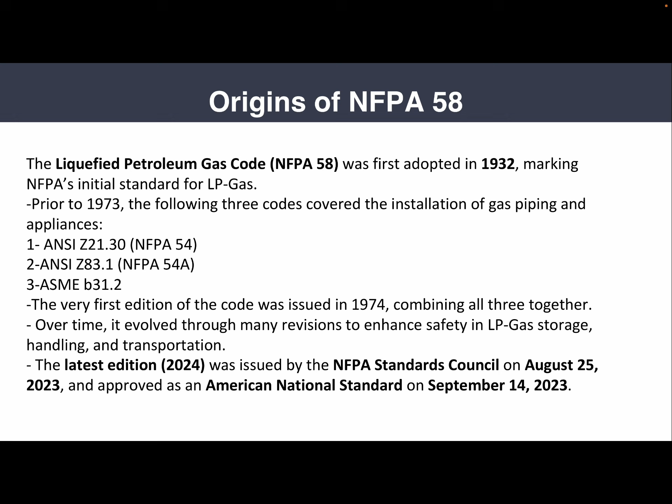In 1974, these were merged into one unified document under joint sponsorship of the American Gas Association and NFPA, creating the first complete fuel gas code. Over the years, it evolved to reflect new technologies and lessons learned from incidents. For example, in 2011, it introduced cathodic protection for underground containers, removed obsolete valve piping rules, and prohibited non-ASME railroad tank cars. In 2014, it added vehicular barrier protection, harmonized container requirements, and expanded personnel qualifications and cathodic protection for piping.

2017 addressed hot air balloons, updated snow load and vehicle impact criteria, added Chapter 12 for mobile LP gas systems, and centralized fire extinguisher rules. In 2020, it added fire-resisting material criteria, revised extinguisher use guidance, and included inspection rules for CGA connections. In 2024, it added Chapter 16 for food trucks, clarified scope for LP gas industrial processes, updated horizontal container installations, and consolidated emergency remote shutdown requirements. So, codes must adapt to new risks, technologies, and user practices.

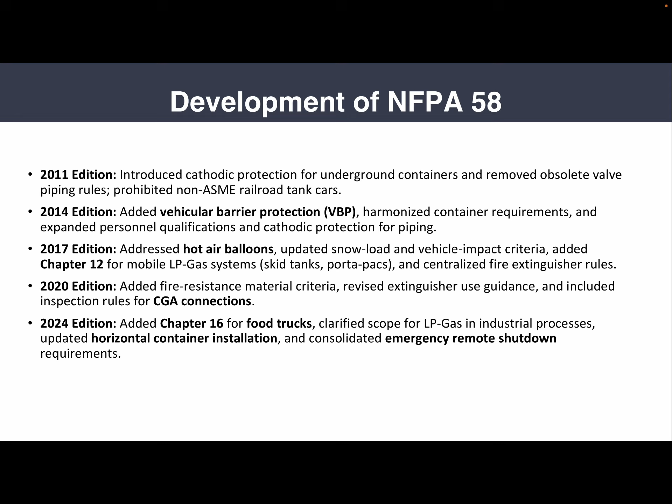Administration Overview. Chapter 1 of NFPA 58 covers the administrative framework of the code. It defines the scope, application, retroactivity, equivalency, units, and enforcement. It applies to the storage, handling, transportation, and use of LPGs, the LPG properties, and the federal regulations referenced, which are the DOT regulations 49 CFR for transportation.

So, NFPA 58 applies to any system involved in storage, handling, transportation, or use of LP gas as a fuel. That includes cylinders, piping, and containers used to supply LP gas, systems serving industrial and commercial operations, transportation vehicles, and marine terminals receiving LP gas for distribution. But for every applicability, there are also exemptions. It does not apply to natural gas refineries or petrochemical plants, chemical process facilities using LPG as a reactant, utility gas plants under NFPA 59, and systems already covered by NFPA 54 or transportation regulated by the Department of Transportation.

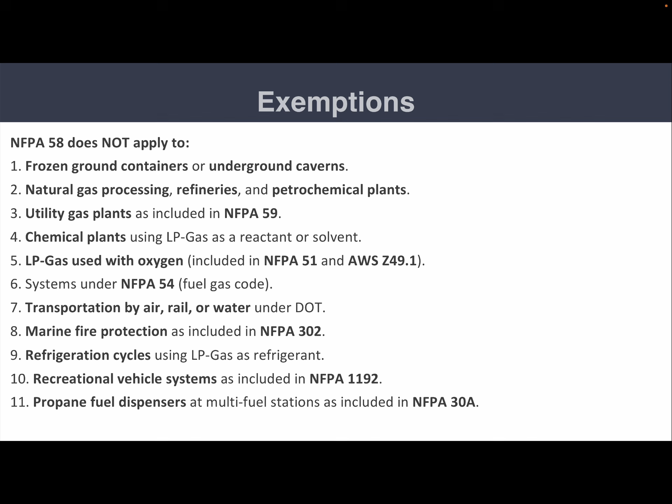Here we have the Arad LP gas explosion, which occurred last February in 2025. This happened in my country, in the Kingdom of Bahrain. On the 12th of February, a restaurant in Arad exploded after an LPG leak accumulated in the kitchen. The upper floor, illegally used as labor accommodation, collapsed, causing 2 fatalities and several injuries. Investigation found flexible hose leaks, absence of automatic shut-off valves, no gas leak detectors, unapproved occupancy conversions, and lack of valid civil defense clearance, which is the AHJ.

The restaurant opened without the approval of the AHJ, and the entire gas system was not approved or listed. So this incident clearly illustrates why enforcement of NFPA 58, NFPA 54, and the Bahrain 2025 code is absolutely essential.

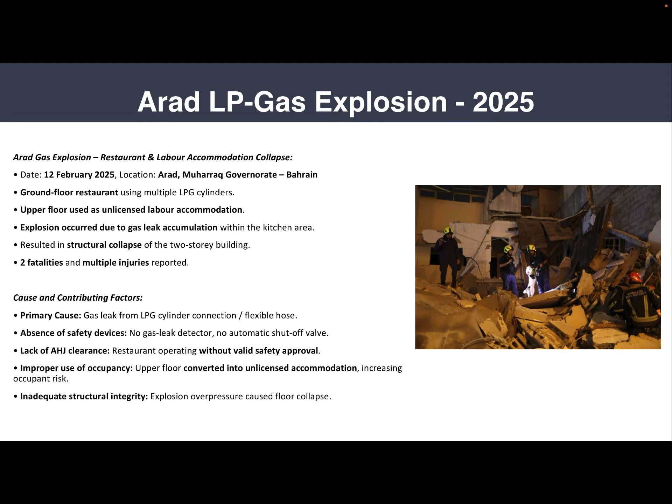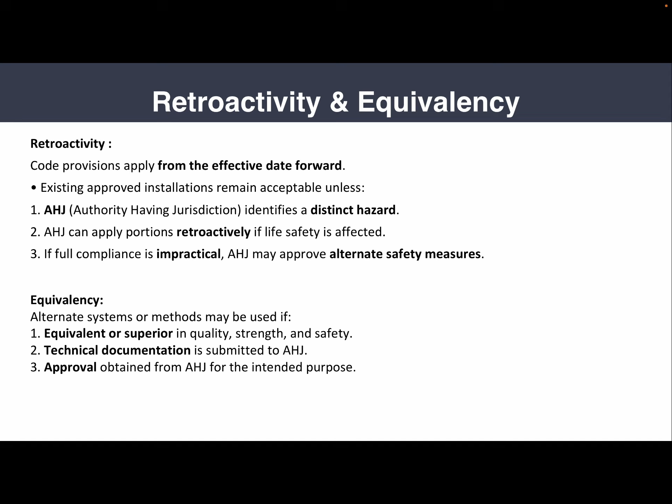Retroactivity and equivalency. Retroactivity means new code provisions apply only from the effective date forward. Existing systems may continue in service unless the AHJ identifies a condition creating a hazard. Where full compliance is impractical, the AHJ can approve equivalent protective measures. So equivalency allows alternative systems that are equal or superior in strength, durability, and safety. In order to gain approval, documentation and performance evidence must be submitted to the local AHJ, which provides flexibility while maintaining safety.

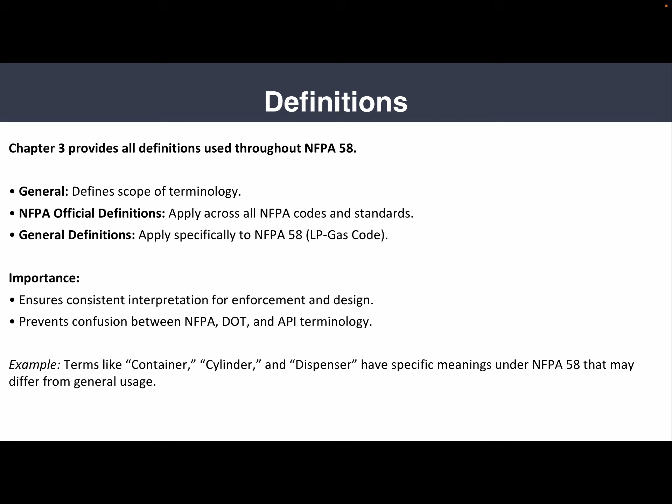Chapter 3 provides all definitions used throughout NFPA 58. General definitions define the scope of terminology. NFPA official definitions apply across all NFPA codes and standards, and general definitions apply specifically to NFPA 58, the LP Gas Code. Terms like container, cylinder, and dispenser have specific meaning under NFPA 58 that may differ from general use. So, first and most important thing, what is an LPG?

Liquefied petroleum gas, commonly propane or butane, is a gas at ambient conditions that becomes a liquid under moderate pressure. It is colorless and odorless. Therefore, ethyl mercaptan is added for leak detection. Because its vapor is heavier than air, leaked gas tends to settle in low areas, forming explosive mixtures.

And when we talk about flammability limits, we're referring to the gas concentration range in the air that can actually ignite. If the gas concentration is below that range, it is too lean, meaning not enough fuel to sustain combustion. And if it's above the range, it's too rich, meaning not enough oxygen to burn. So specifically for LPG, which is mostly a mixture of propane and butane, the flammability range is between about 2% and 9% by volume in air.

That means if the air in the room or area contains LPG within the 2 to 9% range, even a small spark or static discharge can ignite it, leading to conflagration or detonation, flash fire, explosion, depending on how confined the space is. This is exactly what happened in the Arad explosion. The entire restaurant was filled with gas and some spark ignited the whole building and made it catastrophic, which resulted in 2 deaths and 6 injuries, as I remember.

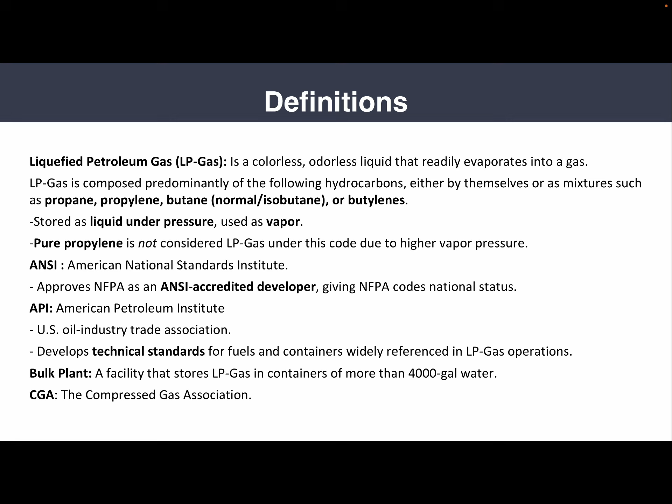And we have ANSI, the American National Standards Institute, and API, the American Petroleum Institute. A bulk plant is a facility that stores LP gas in containers of more than 4,000 gallons water capacity. And CGA is the Compressed Gas Association. A container is a generic term for any vessel, cylinders, tanks, and portable tanks used to store or transport LP gas. All are fabricated under ASME or DOT standards, and it is used broadly in code text when the type is not specified.

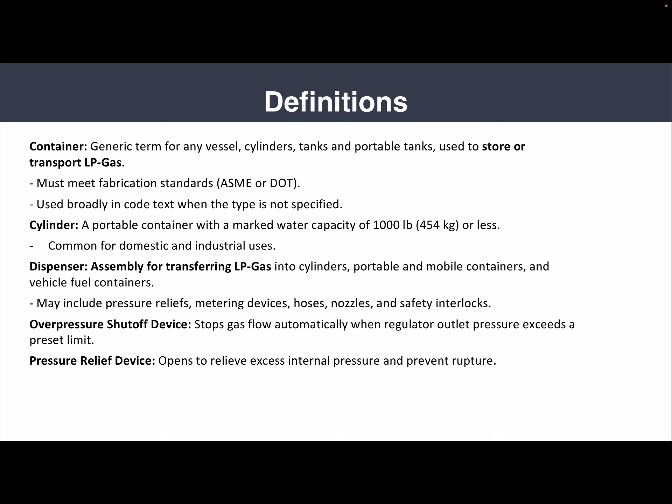A cylinder is a portable container of 1,000 pounds or 454 kilograms or less. It's commonly used for domestic and industrial uses. And a dispenser is an assembly for transferring LP gas into smaller cylinders or vehicle fuel tanks. A pressure relief device automatically opens to prevent rupture from excessive pressure. And we have the most important one, the emergency shutoff valve. It closes manually, thermally, or remotely during an emergency. And the backflow check valve prevents reverse gas flow.

Water capacity is the amount of water at 60 Fahrenheit, 16 Celsius, required to fill a container. It is used to express the size of cylinders or tanks.

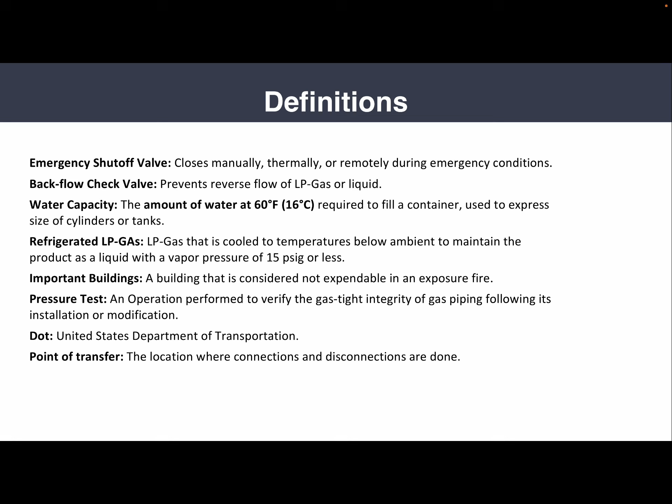Chapter 4 establishes fundamental safety requirements for all LP gas systems. It covers containers and components, odorization, temporary installations, personnel training, fire protection, materials, and shutdown devices, which ensures every LP gas system, from small cylinders to bulk containers and bulk plants, is installed, operated, and maintained using approved equipment and safe practices. So, regarding containers and safety components: approval. All containers and assemblies must use approved components. Acceptance applies either to the full system or individual parts.

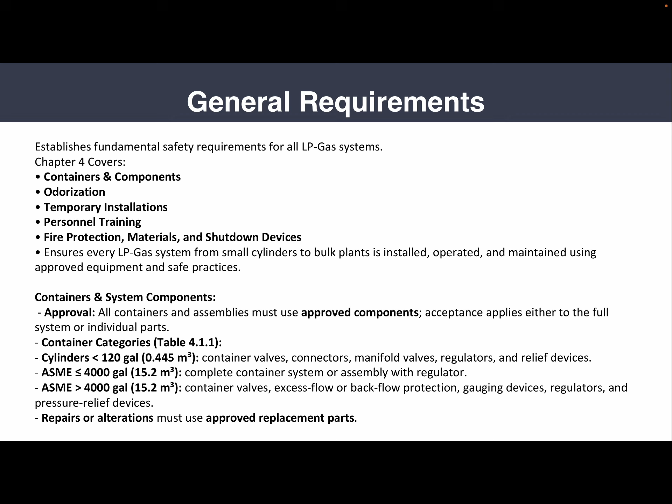Cylinders less than 120 gallons: valves, regulators, connectors, and relief valves must meet specific design listings. ASME less than or equal to 4,000 gallons: complete assemblies with pressure regulators and safety devices. ASME more than 4,000 gallons: equipped with redundant relief and gauging devices. Also, repair and alteration must only use approved replacement parts. Field welding or unapproved modifications are strictly prohibited.

Odorization. All LP gases must be odorized so that the gas is detectable at 1/5 of the lower flammability limit. Ethyl mercaptan is the standard odorant. Why? It has an extremely strong and unmistakable odor at trace levels. It's chemically stable and compatible with propane and butane. It's also detectable long before gas reaches the flammability limits and complies with NFPA 58 and DOT or ISO standards. It's also cost-effective and proven in global LP gas operations.

There are also other odorants such as thiophane or tertiary butyl mercaptan, but they are typically used in methane systems or LNG, not LPG. And ethyl mercaptan is best used under LPG conditions because it does not condense out easily, does not polymerize, and retains odor strength even in cold or humid environments. It's also detectable after long storage or use, unlike some sulfur compounds that break down or fade. It maintains its odor intensity even after long storage or partial evaporation.

And economically, it's not expensive. It's always readily available and easy to meter into bulk LPG systems. And only a few milligrams per cubic meter of gas are needed to meet detection requirements.

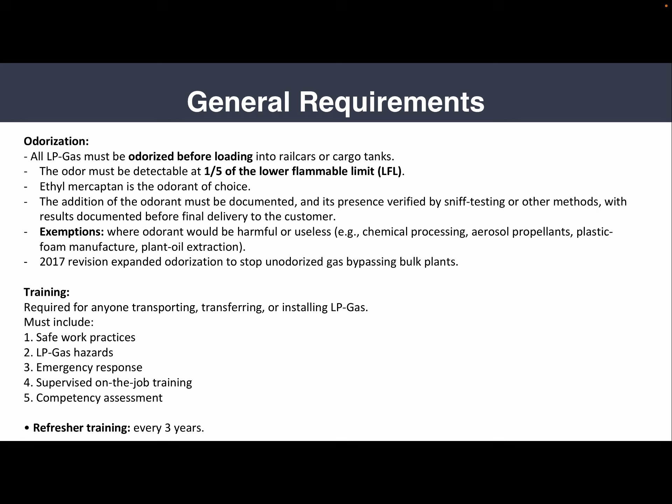Training. Training is required for everyone who transports or installs LP gas systems. They should be trained on safe work practices, LP gas hazards, emergency response, supervised on-the-job training, and competency assessment. Refresher training is required every 3 years, and competency records must be kept for each AHJ audit. We require every company to have a record of the training for every staff member.

Portable fire extinguishers must meet NFPA 10 minimum ABC ratings, but they are not to be used on pressurized LP gas fires until the gas supply has been isolated. Emergency remote shutdown devices must be located 20 to 100 feet from transfer points, positioned along the egress route unless as specified in Chapter 10, and should be clearly labeled.

As for temporary installations, temporary systems such as those for construction site heating must be reported to the AHJ before installation. Installations exceeding 12 months require new approval. These rules prevent temporary systems from becoming long-term fixes without proper safety evaluation.

In the Kingdom of Bahrain, we allow no more than 40% of the container, tank, or whatever temporary installation they have, in order to restrict temporary installations because the building is not yet ready for fixed installations, and we correspond with local gas filling companies to prevent them from filling more than the allowed 40%, until they finish with the temporary and get the fixed installation permit.

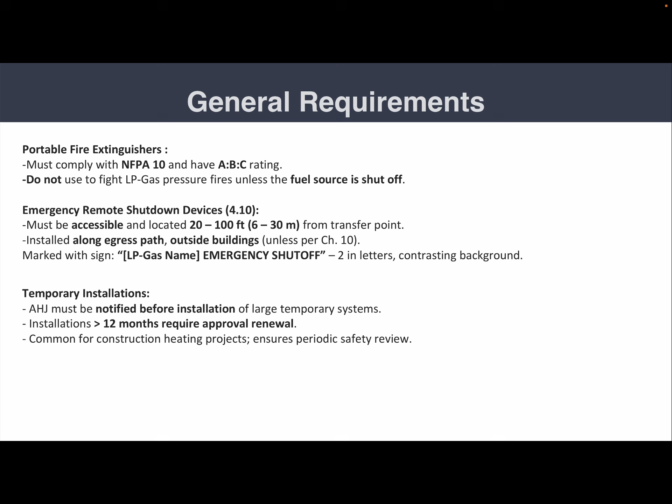So, NFPA LP gas hazard controls: we have NFPA 54, NFPA 58, and NFPA 59. NFPA 54 covers fuel gas inside buildings. NFPA 58 covers LP gas storage and distribution outside the building, while NFPA 59 applies to utility LP gas plants. People usually phrase it as 58 at the gate and 54 under the floor. So clarity between them ensures proper application.

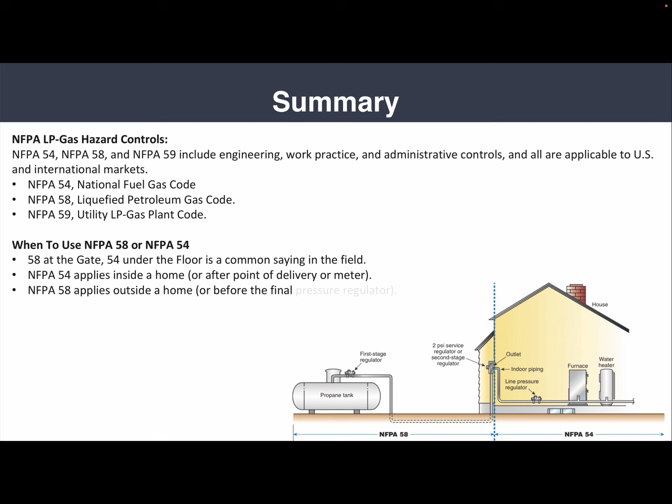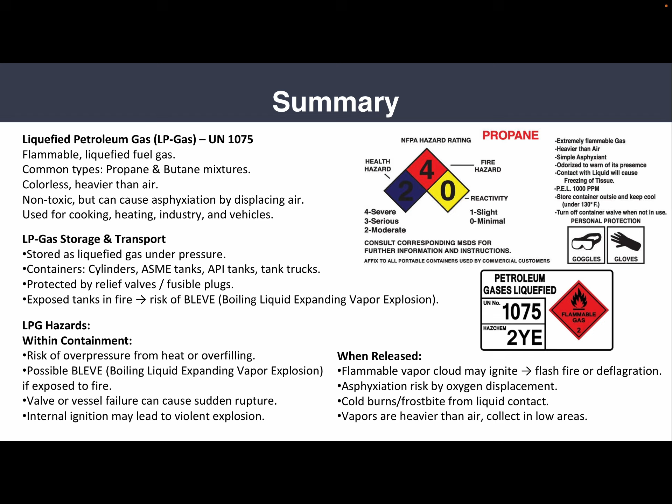So, as a summary, we should only use listed, approved components and trained technicians, maintain required separation distances from buildings and ignition sources, conduct regular inspections and maintain training records, ensure emergency shutdown devices and pressure relief systems, and coordinate between NFPA 58 and 54 to avoid enforcement gaps. So yeah, that concludes my industrial hazard presentation.